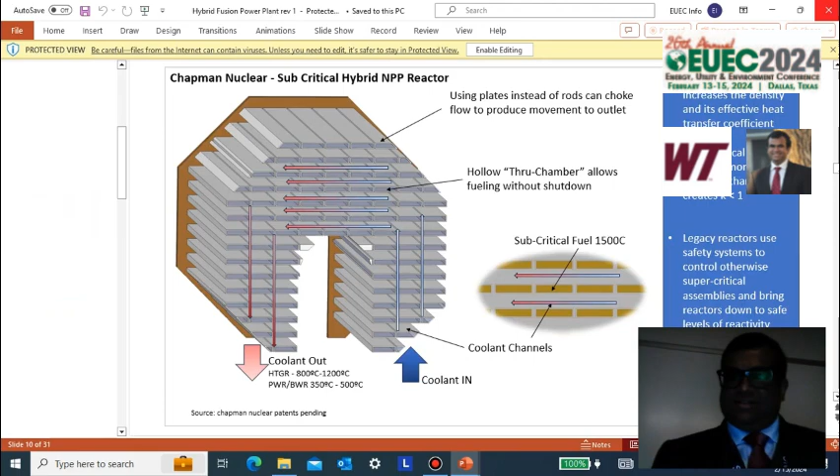Sir. Now let me move on to my presentation.

My name is Joshua Partheepan. I am an assistant associate professor at West Texas A&M University, and my project is on hydrogen gas turbines, or oxy-hydrogen combustion and gas turbines.

So just an overview, just 101 energy. We are kind of in the 21st century. The ability for us to move away from carbon and the public perception, energy security, all fuels in for the renewable energy growth in the sector for about 7% in 2020. And it has been consistent for the last 4 or 5 years, which is great because if that trend continues, then you will see extended amount of renewable energy by 2050.

Consumption of all forms of energy increased in the United States between 0 to 15% from 2022 to 2050, which is great because even though it's about 30-year time period, we are not necessarily increasing our energy consumption, thankfully because of all the conservation measures that we are going to implement in the future, which help us to reduce our energy usage even in the future.

But that's not necessarily the trend around the world. So you will see a significant amount of energy increased, almost about 50% in the next 30 years, especially from the developing countries. And also, there will be a shift in energy usage from other sectors, like if you're using gasoline, if you're using natural gas, you might see all those energy uses being converted to electricity usage in the future.

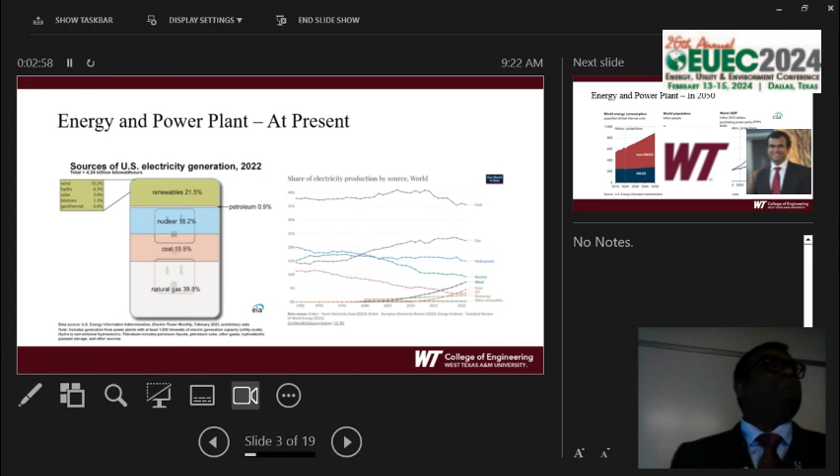Interesting enough, you will have a little bit of higher renewables in and around the world, thankfully because of the hydropower, especially in Europe and China and some of the other countries which has more power. That trend is going to pretty much stay almost the same, which is surprising, in 2050.

So if you see the energy trend going from 2020 to 2050, you can clearly say that developed countries, US, Canada, Mexico, Australia, most of Europe, their energy usage is not going to change much. But the energy usage in all the developing countries is going to change significantly higher. And that's the trend that you would see in there, which correlates with the world population increase and the GDP increase in those developing countries.

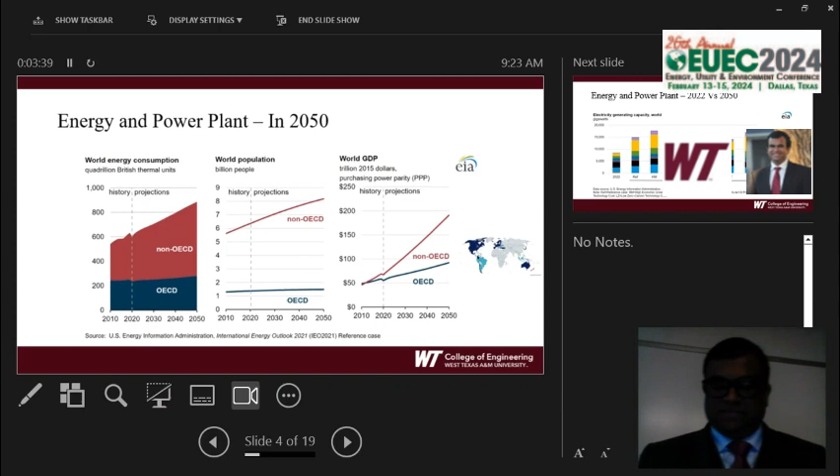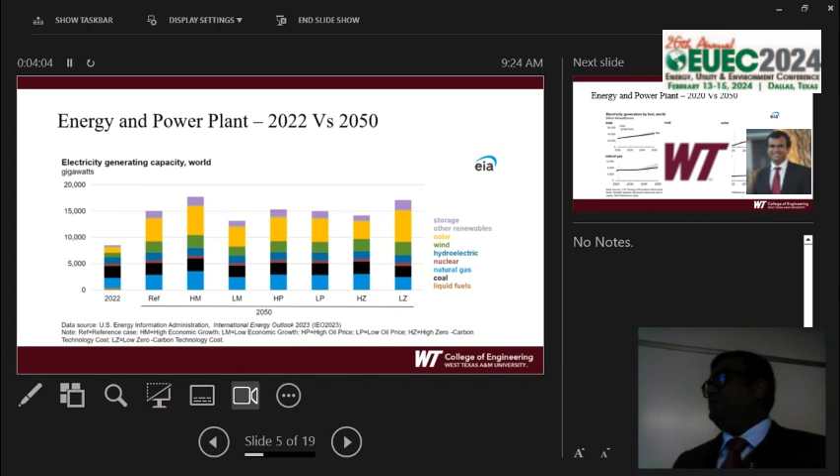And this would be what the energy mix is. What I might say is look into the reference. So we will still have coal power plants in 2050. It might be decarbonized, I would assume, but we are going to see a significant share of coal, nuclear, and natural gas power plants in 2050. But there will be a significant increase in solar generation and some increase in wind power, which I believe the next graph is going to give you a rough reference.

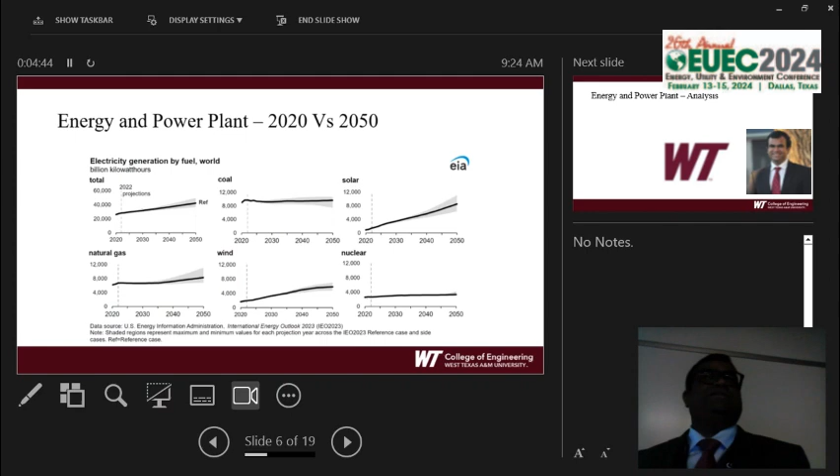So if I collectively summarize this, about 1/4 of the energy is going to come from coal, another 1/4 from natural gas, 1/4 from solar, and collectively wind and nuclear will contribute the remaining 25%, which is kind of interesting because all the previous 4 slides tell you a picture that power plants are not necessarily going to go away anytime soon in the next 30 years or so. You're going to see natural gas and coal power plants almost contributing 40 to 50% of electricity in 2050 around the globe.

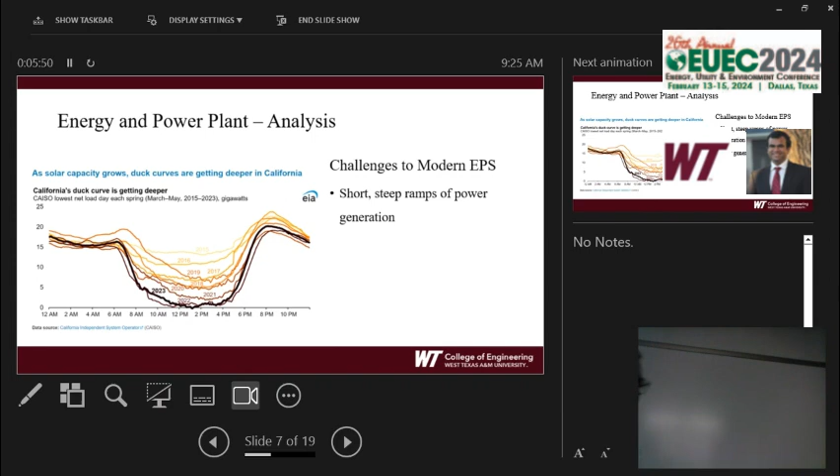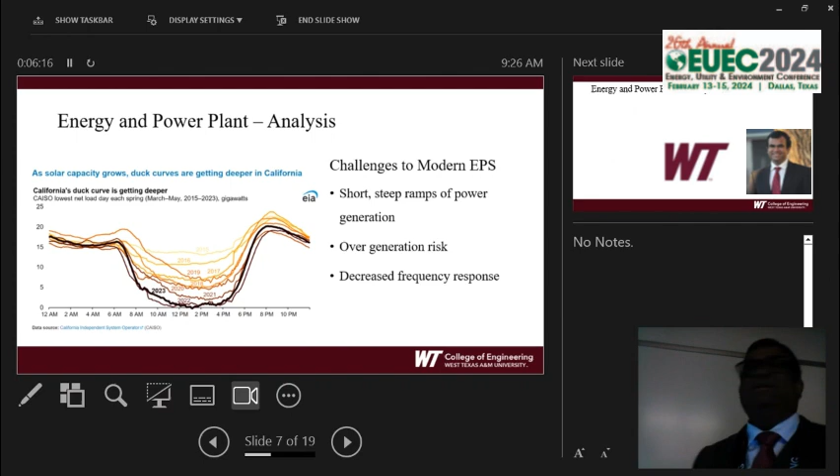which brings in another problem with frequency control because that is solar, which means it's inverter driven. So there is no dynamic spinning reserve or there is no moment of inertia in the system. So if there is a voltage drop and if it's big enough, then it would pretty much take the entire grid out. So the three main problems: short, steep ramps of power generation, overgeneration risk, decreased frequency response. And I think that's the contributing factor for power plants to exist even in 2050.

So there, because we are referring a lot to power plants, my research objective is how can I take the power plant like concept and try to make it greener in nature, more dynamic, more resilient, longer lifespan cycle, but still have a significant advantage over other storage systems. So one of the technologies that I really like is looking into rocket engines.

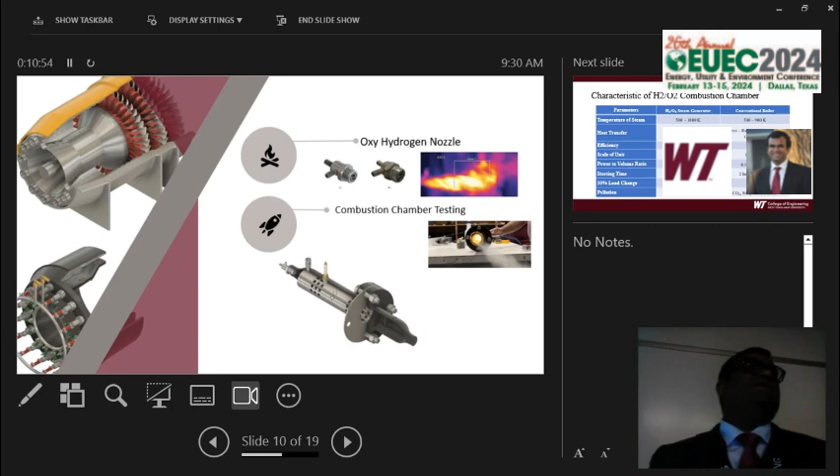I can also use it in conjunction with the gas turbine power plant because there is a concept called steam injected gas turbine, where I can take the steam and replace the exhaust flow gases with steam in a gas turbine, which would almost give a better efficiency when compared to an exhaust gas flow.

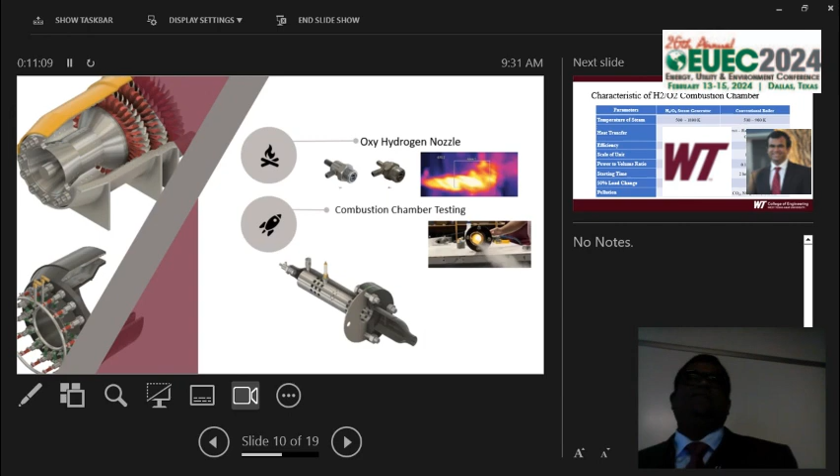So this is the characteristic of a hydrogen oxygen steam generator. So you're looking at a temperature range anywhere from 500 to 1800 Kelvin, whereas in a conventional boiler, you're looking at 500 to 900. This is a direct mixing process rather than an indirect radiation, convection, and conduction process. So the efficiency is really high because of direct mixing.

So you're looking at 98 to 99.5 efficiency, irrespective of what your cycling is. So even if you're cycling at rapid rates, that efficiency pretty much stays the same. Scale of unit, you're looking at 10 to the power of -3 meter cube per megawatt. So it's relatively really small for a megawatt system.

So if you're talking about a 10 megawatt system, you're collectively looking at the size of this table. Not necessarily because of the technology, but because of the capabilities of oxygen and hydrogen combustion. And then starting time, less than a minute. Of course, it's a rocket engine, just repacked in a different version.

And then load swing, 50% load swing, less than a second. Again, because it's a rocket engine. Well, the combustion chamber can handle that. Not necessarily the turbine or any of the downstream equipment can handle it. It just tells you the capability of the system, not necessarily the plant itself overall.

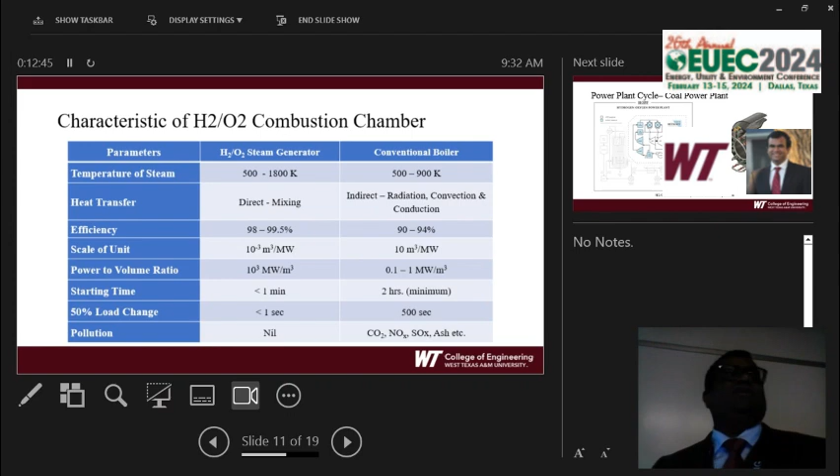Pollution, there is no pollution because you have taken hydrogen, oxygen, you have combusted it, generated steam, and you're running it in a closed system. So there is no pollution whatsoever in this system. So then if I take that system, what are those applications? I can come up with different applications.

One of the instant applications that we can think of is, because it produces steam, can I use it in a coal power plant? Yes, you can. You simply eliminate the boilers and you eliminate all the downstream equipment after the condenser. So you don't worry about any of your dust collectors, ash collectors, selective catalytic reduction, ESP units, any of those. You can forget all those units.

And you can also forget about the ID fans, FD fans, and all those things because everything is handled by the combustion chamber. So all you need is a hydrogen source, oxygen source, and then the combustion chamber. Then you're basically taking the steam at whatever temperature you want the turbines to operate, inject it directly, and run the power plant. Right?

Will you gain any efficiency because of this? Yes, you will, but it would be minuscule. It's not a lot of efficiency gain. So you're still operating your power plant at roughly about 33% efficiency, but it's very much possible.

Can you implement it as a pilot scale in a power plant? Yes. If you want your power plant to have a bigger load swing, your boiler may not be able to handle the steam delivery. So what you do is you put this system alongside your boiler so it produces auxiliary steam which can quickly ramp up or down your conventional coal power plant.

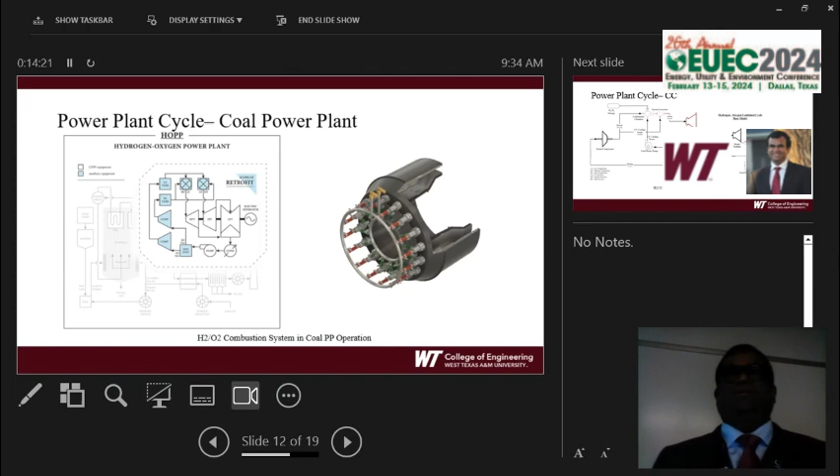Can I use it in a combined cycle plant? Yes. And this is where it gets exciting, because now I can take a conventional power plant and I can remove the compressor out of my gas turbine. And why? Because in a conventional gas turbine, I'm sucking the air, compressing it, running it through the combustion chamber, and then into the turbine. In here, because there is no air involved, I don't have to compress anything.

And usually, hydrogen and oxygen are stored in a compressed format, minimum of about 300 bars. So my gas turbine operates roughly at 30 to 90 bars, so I don't have to worry about compressing my hydrogen and oxygen. So in that case, when my pressurized hydrogen and oxygen is supplied to me, all I have to do is fire it from the burner section. So I don't need a compressor.

So I burn my gases and then I produce steam which is equivalent to the hot gases that I would get out of a combustion chamber and run it through my gas turbine. Gas turbines will handle steam just fine because most of the high performance jet engines during the 1980 era actually used to inject water into the gas turbine to gain performance at higher altitudes. So it was a very established system, not necessarily in use in a conventional power plant setup, but it can be used. So conventional gas turbines can be converted to steam injected gas turbines, which gives you the same efficiency.

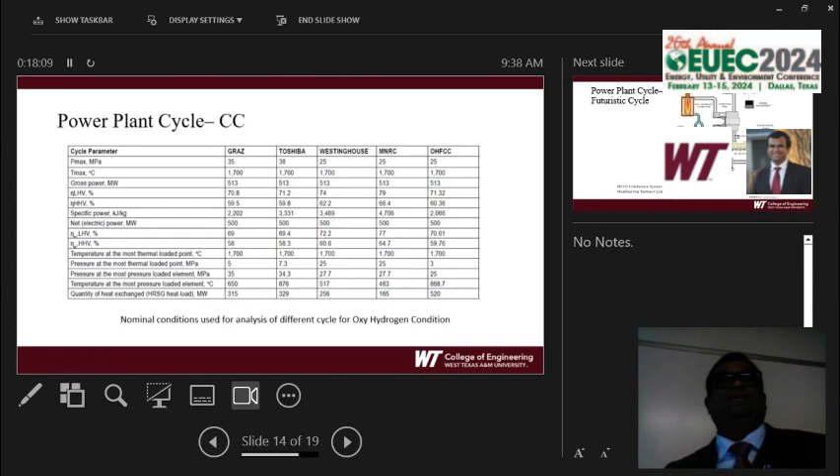And what is the theoretical efficiency that you're looking at? Roughly about 70%, right there, 70 to 60% LHV or HHV. So is it practical to get those efficiencies? Yes, it would be practical. Again, because there are no pollutants in the system and no other auxiliary units that are going to be present in the system.

So then, can we push it even further to a futuristic system which can handle those loads? Yes. So this is basically a modified gas turbine system, which does not necessarily have the steam turbine component to it. So what you're doing here is taking your hydrogen source and your oxygen source, both compressed in nature, firing them in the combustion chamber, converting it into steam, and running it through your turbine, which powers the generator.

Then the hot exhaust gas coming out of the turbine, roughly about 600 degrees, 1.5 bars, you run through your condensing HRSG, which helps to extract all the heat into another water stream. This water stream is going to pick up the heat almost in a subphase, which is basically like superheated water that can be injected into the combustion chamber for cooling purposes.

So that way, rather than having a separate system that runs the steam turbine, you're extracting the heat to run your gas turbine system, thereby increasing the flow of steam that runs through this system, thereby increasing the efficiency. Not by much, maybe by 1 or 2%, but the biggest thing is the reduction in components in the system. So rather than having two separate cycles, two separate turbines, you're boiling it down to one bigger gas turbine, which is much more resilient in nature.

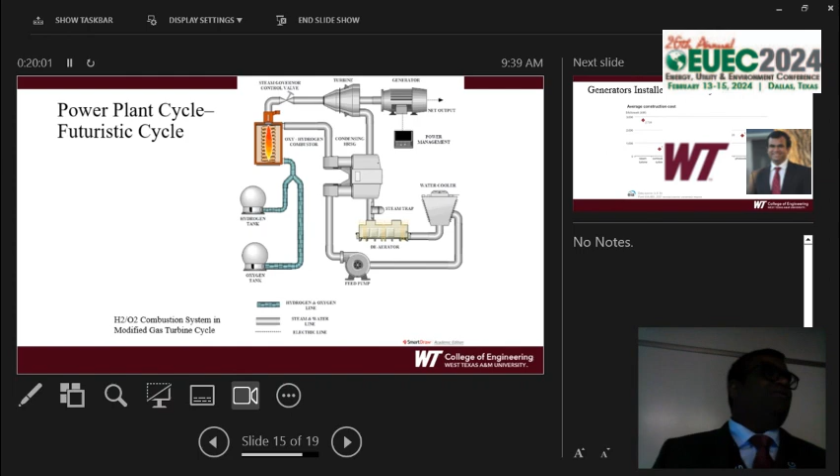So what would be the efficiency, operating efficiency? Roughly about 58 to 60% in efficiency, but with much more reduced components in place.

So then we thought about where would this system fit in terms of pricing? Is it going to be very expensive compared to any of the systems in the market? Not necessarily, because the combustion chamber and compressor system is out, which means you are reducing the gas turbine by 50%, which is what the cost that I would assume to build a combustion chamber for the hydrogen oxygen system.

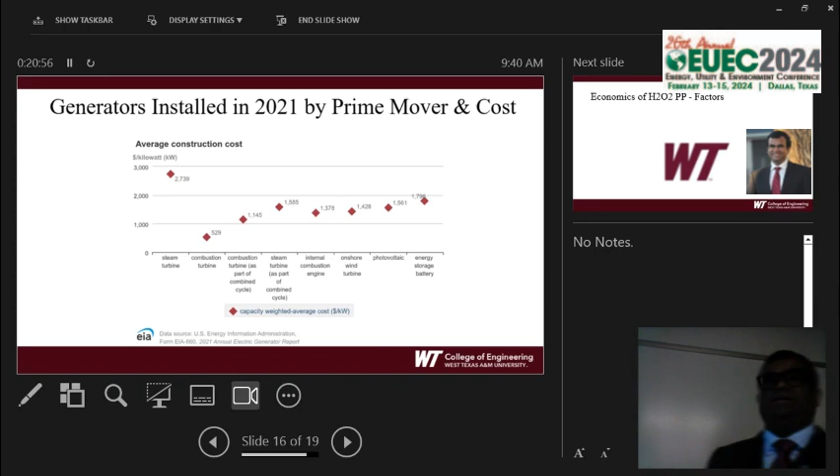So again, there are no special components or anything in there, just normal engineering design that our graduate students were able to put together and build. So it's not necessarily any complex design, it's just a 3D printed rocket engine in a miniature form for power generation applications. So I would assume in a combined cycle system, the pricing would be very similar to what a conventional combined cycle system is.

So then, if I start talking about economics of hydrogen oxygen, what are all the different factors that determine what my price of electricity is going to be? One would be the capital cost of the power plant, which I said would be pretty similar to a combined cycle conventional power plant. Then the second would be operating cost of the power plant, which depends predominantly on the hydrogen, not necessarily on the maintenance of the power plant.

And then capacity factor, that plays a major role. Am I turning on my power plant only 10% of the time, or am I going to run the power plant in a consistent manner? And then my hydrogen source and my hydrogen storage come into play as well. Hydrogen storage is an interesting thing, because if I'm trying to run my power plant at a 50% capacity factor, then I can use salt caverns or any underground storage that are in existence for natural gas.

So that's interesting, because natural gas on a large scale can be stored underground in the underground caverns, which can be used without much modification for hydrogen storage as well. So that would be one of the biggest benefits, and it can hold hydrogen gas for up to 6 or 7 months, which is what a typical natural gas system would use as well.

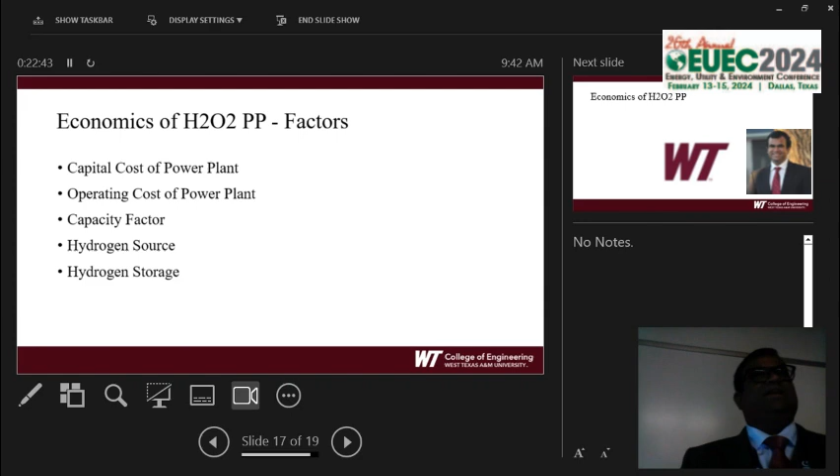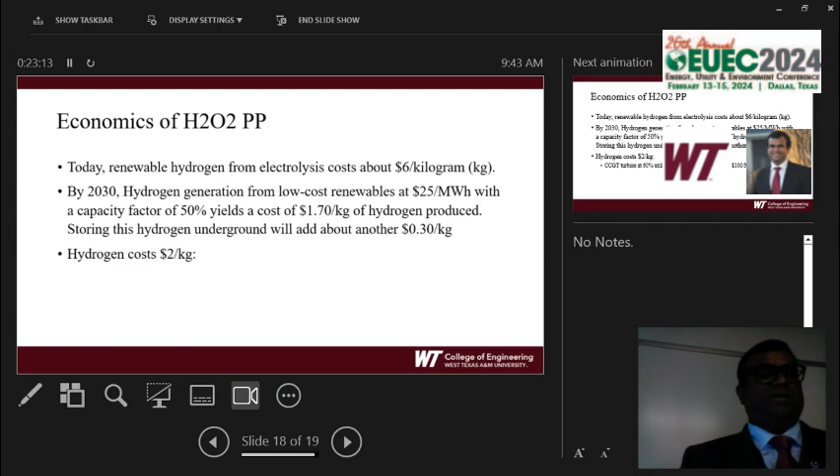So some estimations that I was able to put together: today's hydrogen cost from electrolysis, very optimistic number, is about $6 per kilogram. By 2030, hydrogen generation from low-cost renewables at roughly 2.5 cents per kilowatt hour or $25 per megawatt hour, with a capacity factor of 50%, yields a cost of hydrogen at $1.7 per kilogram. Now, if I factor in that I'm storing the hydrogen at underground storage for a long period of time, that would add another 30 cents to the kilogram of hydrogen, making it $2 per kilogram.

If it's $2, and if I'm using it in a combined cycle power plant with 60% utilization factor, then I can deliver power anywhere from $100 to $180 per megawatt hour. In other words, from 10 cents to 18 cents per kilowatt hour. If I'm using it in a normal simple cycle turbine at 25% utilization factor, which is predominantly going to be a retrofit, then I can deliver it at 20 cents per kilowatt hour.

If I'm retrofitting a coal power plant at 50% utilization factor and about 33% efficiency, then I can deliver at 30 cents per kilowatt hour. So these are really optimistic numbers. But if you want a realistic number, I would say in a combined cycle newly built power plant, we might be able to deliver it anywhere from 18 cents per kilowatt hour to roughly about 30 cents per kilowatt hour, depending on where the hydrogen is coming from.

Now, thankfully, I'm supposed to present first, but I let him present first. So if he can deliver hydrogen at under $1, then we are talking a different story in the economics there. Because that might make my life so much easier, because hydrogen technology is there, the utilization factor for using it in an existing power plant framework is there. It's just the cost would be the most prohibiting factor in the scenario for a mass transition. If the cost of hydrogen from different sources is reduced significantly, then we'll be seeing large scale power plants using oxy-hydrogen combustion systems.

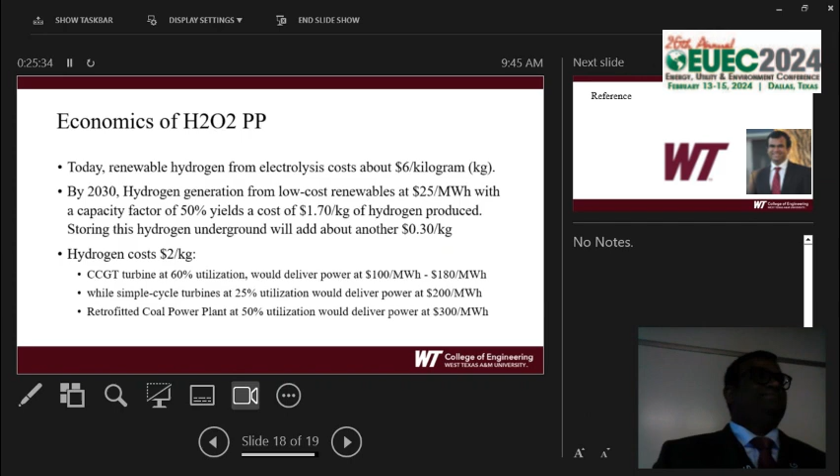Does that apply to new models of integrated solar, when you're looking at it integrated with microgrids, with storage? What are the economics? The storage, I mean, that's what it's for. No, storage like lithium ion or zinc ion. That was my question, how does the storage come into play?

My question, I'm sorry, when you're talking about solar, your assumption is what we're doing right now, but there are new models coming out that are integrating solar generation bundled with storage, with long-term storage, with microgrid technology, so that you have intelligent efficiency with the energy we're using, an integrated solution. I understand the assumptions you're making about solar now, but these new models coming into play, are you familiar with them? And if so, how do the economics work with that?

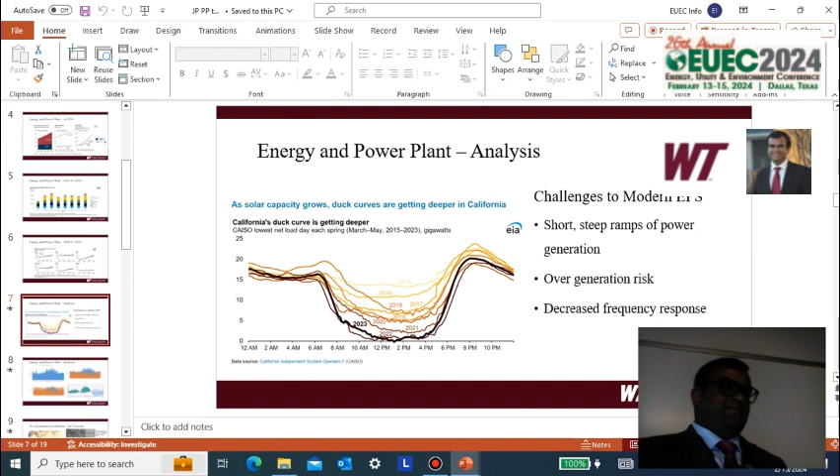And then the second thing is, if I capture the hydrogen, this would be more apparent in the next one, because in Texas, my winter load is roughly about 40 gigawatts, but my summer load is roughly about 80 gigawatts, almost the double. So here in West Texas, the wind is very prominent in the winter months, but not so much in the summer months. So now I have an excellent opportunity to capture all this excess power in this region, put it in the salt caverns, which are also very prominent in West Texas, store it for up to 6 months and then deliver it during my summer peak times. So that is possible because of hydrogen. Those are the scenarios where hydrogen might make much more economic sense, for a large amount of power stored over a long period of time.

And your method of creating hydrogen varies dramatically, like if you use electrolysis from pure water, or if you take it from methane or a hydrocarbon, which is a lot easier to break apart. What are the costs for hydrogen? Hydrogen's not my specialty. It's about $1. But if you're talking about electrolysis, it used to be $10. Now it has come significantly down, so it's about $6. There are also other technologies in the market with nuclear, which are concepts. They say they can deliver hydrogen at 40 cents per kilogram, which is possible. We just need to get there, and that would play very much into the hydrogen economy.

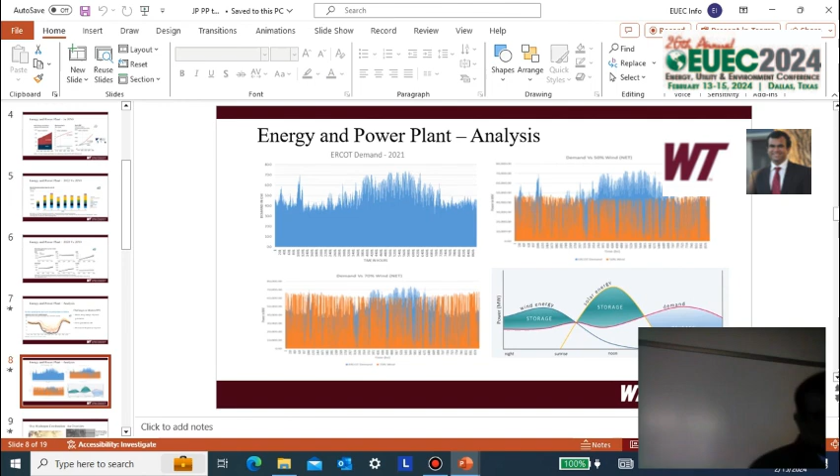Any other questions? Thank you so much. I guess that almost concludes our session. I was almost gonna put a slide in there with peak loads and stuff, but I thought that... Can I take a picture of you beside your PowerPoint? Sure. I just wasn't sure what time I was on.

Are you in this session too? I don't remember, to be honest with you. Ben, that's for real. From Burns & McDonnell? Yep. Okay. Would you like to come in? Me, or is there anybody else? No, I think just you. And my memory stick is not cooperating. So do you guys have it on it? Is that yours?

Can't unencrypt it, so it won't let me copy to it. It's not either one of these, right? No. But I can plug my laptop into it, or should be able to. We can try that. Will we be able to record it? Is it okay for you to be recorded? Because they're trying to record every session. Yeah, I think so. Let me use one of the other guys' laptops. Or if anybody's got a memory stick that's not encrypted, I could try that. Try this. We'll figure that out. It's IT everywhere. I can't escape it.